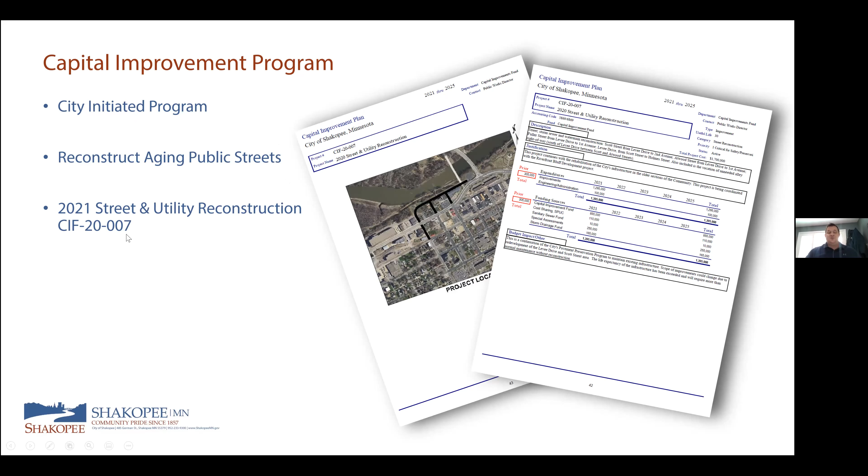The proposed project location, the original CIP, included all of Scott Street from 2nd to 1st. It also included Atwood Street from 1st Avenue or County Road 69 up to Levee Drive, Fuller Street from 1st Avenue up to Levee Drive, and Levee Drive from Scott Street just past the Holmes Street Bridge and before that parking lot on the east end.

This CIP project has been amended. We are not going to be reconstructing Scott Street from 1st Avenue to Levee Drive, Levee from Scott to Atwood, or Atwood from 1st to Levee. Those will be constructed as part of the River Bluff development.

The City of Shakopee EDA, the Economic Development Authority, has entered into a developer's agreement with that developer, and as part of that they will be doing those public improvements. We are coordinating that effort with the city and the developer.

So what do we have for infrastructure out there? Scott Street, this is from 2nd to 1st Avenue. Right now it's 45 feet wide, asphalt roadway. From the picture you can see it's heavily cracked, alligator cracked. It's a relatively flat street.

The north half of the block up above here has concrete curb and gutter. The south half does not, leaving us with very wide roadways. You can see mud and other stuff being tracked out into the street here.

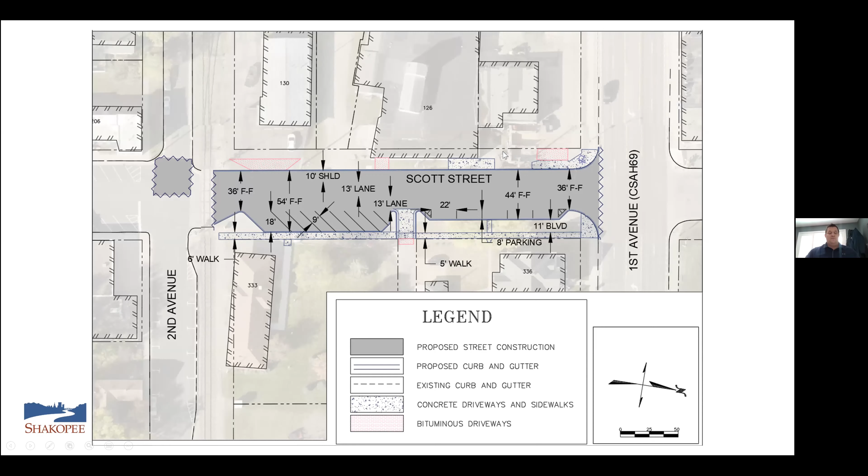On Levee Drive, here are the pictures for that. Right now it's 27 feet back to back, 26 face to face, bituminous roadway.

The west half is generally flat, slopes pretty good on the east half. It's got concrete curb and gutter, and it does have a storm sewer pipe system that drains it, most of it directly to the Minnesota River.

Along the east or the north side of Levee Drive, there is also a DNR bituminous bike path. And there's no sanitary sewer main in the roadway.

This roadway was generally built around 1967. You can see from the pictures, things have deteriorated significantly. There are areas of curb where we can't even get drainage to the structures. Lots of cracking and deterioration.

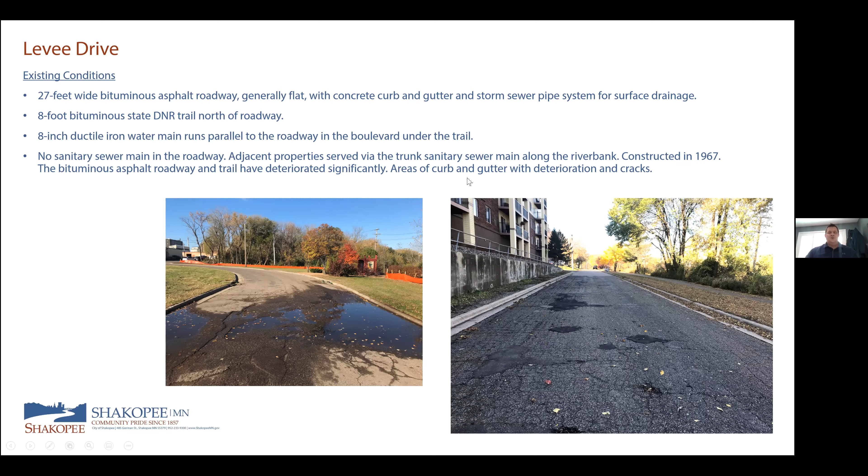So, proposed conditions for this roadway. We're going to reconstruct it to a similar standard: a 4-inch bituminous asphalt surface with 8 inches of Class 5 aggregate.

We're proposing to add parallel parking on the north side of Levee Drive, opposite the apartment building, as well as another block east of there. Some of this parking is being added for the adjacent apartment being constructed to the west, and we're setting up this area for additional parking as the park's master plan develops. There's redevelopment opportunity for Huber Park and this parking lot on the east end of Levee Drive, which will accommodate that parking.

We're going to install a concrete 5-foot sidewalk along the back of Levee Drive. With that parking adjacent, we want people to be able to get out of their cars and connect to the city sidewalk and trail system.

We also have to reconstruct a small portion of the DNR trail due to the street grades. We're going to put a couple extra catch basins in the area to accommodate the additional impervious surfaces we're adding and pick up the water.

We'll be doing upgrades of all the ADA facilities—all the sidewalks and ped ramps will be upgraded to make sure we meet our ADA criteria.

We're proposing to install 2 streetlights for the new parking spaces—one near the gazebo area and one somewhere down on this portion of Levee Drive. No sanitary sewer or water main improvements are needed or proposed in this block.

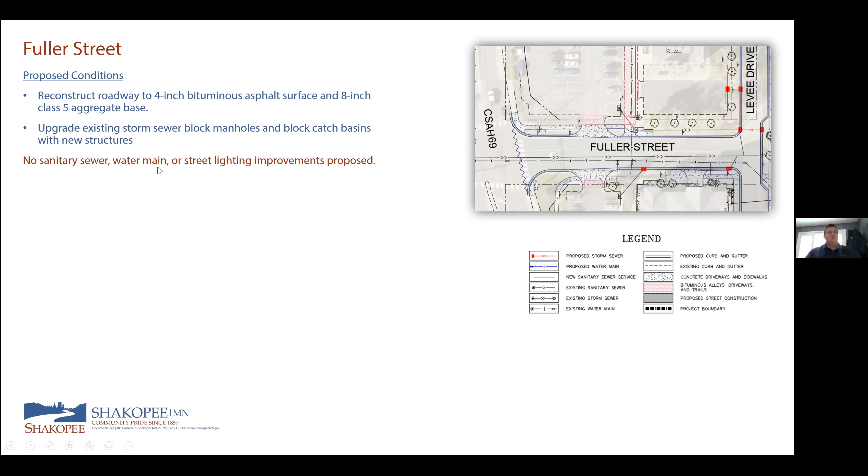There's no sanitary sewer, water main, or street lighting improvements proposed along this block.

The alley between Atwood Street and Fuller, adjacent to your property, currently varies between 12 and 14 feet wide, averaging 13 feet. It's generally flat, with no curb and gutter, and there are storm sewer catch basins on each end that capture surface water from the alley.

Shakopee Public Utilities has an 8-inch ductile water main under the alley, constructed around 1980, in pretty good condition. There's no sanitary sewer under this alley; adjacent properties are served via the sewer trunk line by the river, also constructed in 1980 when the water main went in.

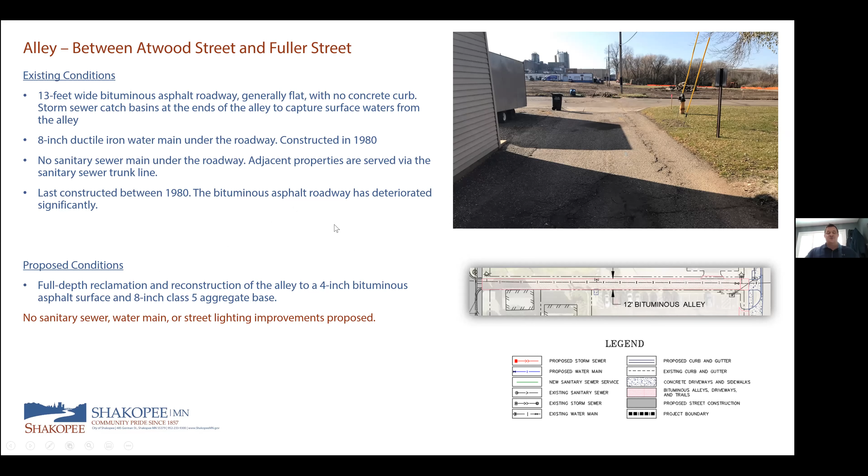From the pictures, if you visit the site, you can see the roadway into that alley is in tough shape. So our proposed condition is a full depth reclamation, grinding the existing asphalt surface into the aggregate below, then paving a new 4-inch bituminous asphalt surface over the top. There are no sanitary sewer, water main, or street lighting improvements proposed for this alley.

So you mentioned the River Bluff development, which will be coming in adjacent to you at Atwood, Levee, and Scott, encircled by this block. This is just a little picture and depiction of what is tentatively planned and seeking further approval from City Council to move forward with.

The apartment building is under construction. They've probably got about 80% of their footings in place right now, and we're working with the developer to refine and finalize the construction plans for the roadway elements. I can come back to that.

We're looking at, on Atwood Street, diagonal parking on the west side, parallel parking on the east side—a little bit more diagonal on the east side, excuse me. Levee Drive on the north side will again have diagonal parking, increasing parking throughout all these areas. We'll have a concrete sidewalk running back behind there that'll tie into the DNR trail system and provide connectivity for everybody in the area.

Scott Street, we're trying to maintain as much of the parking for the adjacent businesses, understanding there'll be demand from the apartment and the restaurant. The restaurant's proposed to be in the northeast corner of the facility.

I can go back one here. It's like two levels of townhouse style houses up against Levee Drive, apartments for the rest of it. They do have underground parking for their residents. There's also some attached townhouse style units in a separate building up along 101 that will be constructed as well, with a couple levels for that restaurant with lookout over the Minnesota River.

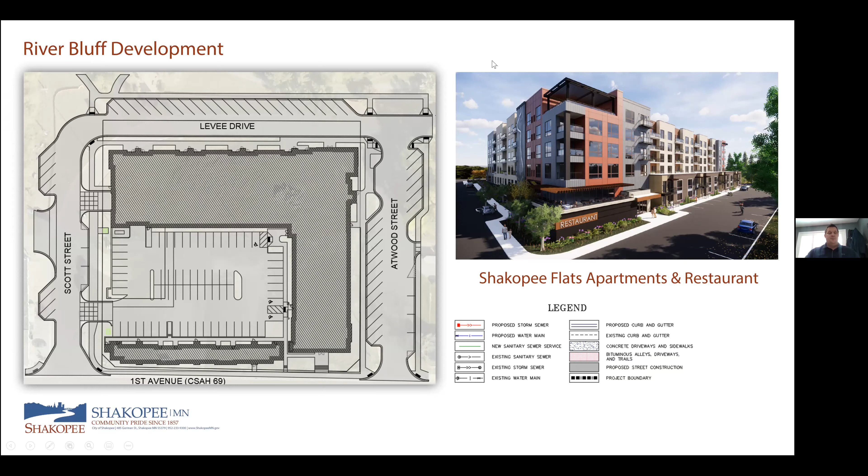So what does this look like for you guys? We take care of everything. We'll do the construction—pipes and utilities get dug in first, then we start the street reconstruction. We'll take care of pretty much everything, putting things back together the way they had been originally constructed, into newer, same, or better condition.

These are some pictures of past reconstruction projects showing that everything's tied in. We'll restore driveways to matching conditions—if it's concrete, you'll get concrete back; if you have pavement, you get pavement back. Everything will be restored with 6 inches of topsoil and sodded, and sod will take care of getting it to grow. There's a warranty period that goes with all of this.

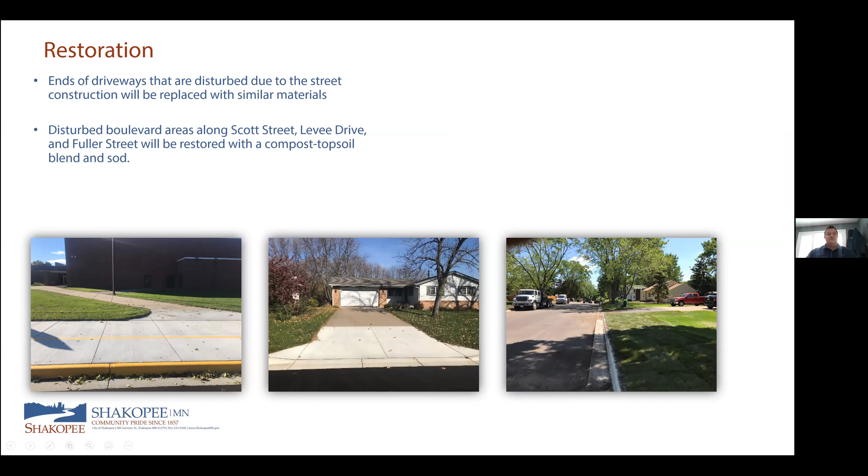With that said, these reconstruction projects come with inconveniences, just in the inherent nature of doing construction. There's trenches that need to be dug for those pipes, and anywhere in this area there's a lot of bedrock, so some of that pipe excavation could be slow to remove the bedrock. While they're digging, there's disruption.

Concrete always poses a significant issue for access—when we pour the concrete, we need roughly 5 days to stay off it to allow it to cure and harden, and similarly for elements like the paving. Sometimes these projects are dusty, dirty, and can be muddy if we get a lot of rain.

We have staff on site that work to mitigate all these issues and work with you. Throughout the project, we'll be talking to you, providing newsletters and website updates. There's even a sign-up for updates.

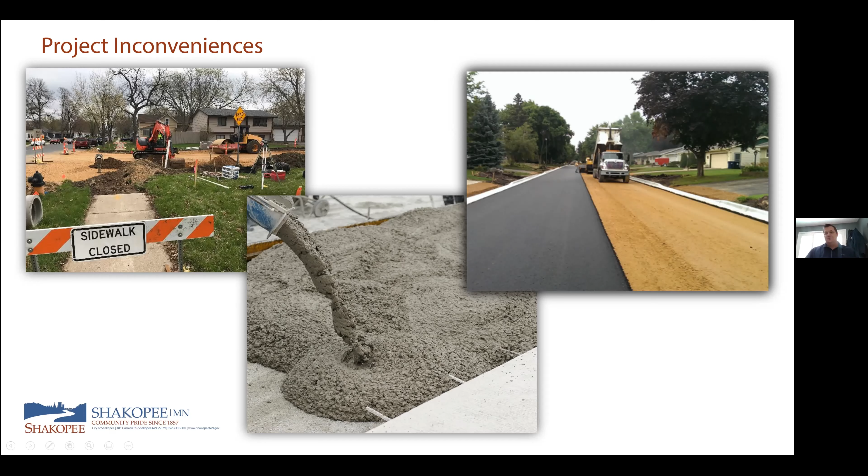Excuse me, I gotta go back a couple here. There's even a city sign-up email blast system that you can sign up for our weekly updates, and as we know more information, we pump that information out to you guys as well. We'll make sure you have our resident project inspector on site, with all their contact information as well as emergency and contractor information along the way.

So what are we looking at for costs here? Probably the question that everybody's looking at, right?

So the total improvement cost is right around $971,000. That's all engineering, administration, and construction costs. The street portion, including the street lighting, is about $736,000 of that. About $108,000 is storm sewer. There's about $10,000 in sanitary sewer work, and about $117,000 in water main SPUC related items.

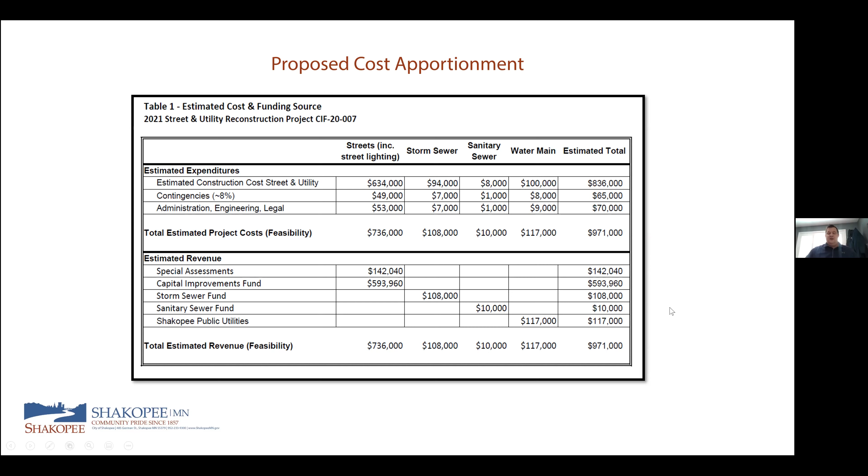Now, with all of these street reconstructions, the city has a special assessment policy that has been determined by the city of Shakopee, the city council. This policy has been in place for a long time with very consistent administration.

We assess 30% of just the street improvements to the adjacent properties. Sanitary sewer is paid for out of a sanitary sewer fund. Water main is paid for by Shakopee Public Utilities. Storm sewer is paid out of a storm sewer fund.

So you're just paying for basically the curb and gutter, the bituminous asphalt, rock, sod, the restoration elements at the surface. There's some notable stuff in here. All the lots in this project area are proposed to be assessed on a front footage basis, but with that said, there's some exclusions.

On Scott Street, I have one single family residential property at 336 First Avenue. Consistent with all of our other projects, we assess those, even though the long side of their property is 142 feet and it faces our project, they'll be assessed on a 60-foot lot equivalent basis, like all the other residential properties in town. The other 82 feet will be proposed to be paid by the Capital Improvement Fund that will not be assessed. The north half of Levee Drive is not proposed to be assessed.

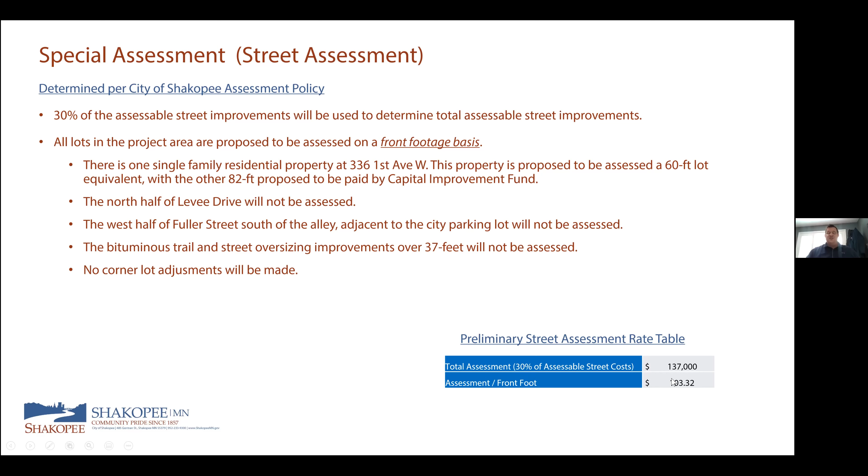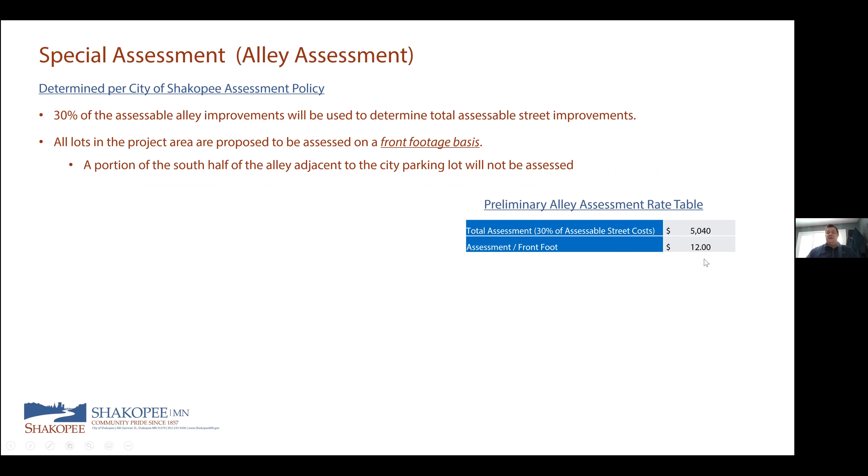There's a total of $137,000 that is assessable directly to the adjacent properties, and that works out to be about $103 per linear foot of front footage. And then for the alley, much narrower, no curb and gutter, all of the above, that's a much lesser cost. There's about $5,000 in assessable costs for that alley, and it's about $12 additional per foot for that.

A special note, typically if we were to reconstruct Atwood, Scott, and Levee Drive around the River Bluff development, you'd be assessed for a portion of that project as well. However, similar to what we've done in other projects, when developers come in, this particular project received a tax increment financing district for this project. And a portion of those TIF funds will be used to offset the assessment costs.

And the developer is picking up the half of his, the street that would be assessed as part of his development cost as well. So your property, John, would not be assessed for Atwood Street at this time. 40 years from now, if that road ever gets rebuilt, then you would be assessed. Similarly, for the residential properties, they will not be assessed for their portion of Atwood Street.

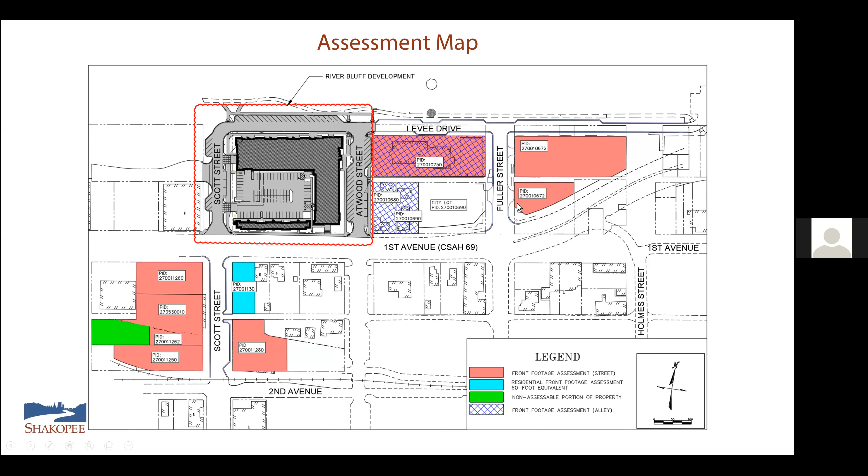And it's a tax increment district. At that time, the city was to create a bridge, believe it or not, across the highway, so that our tenants would not have to cross First Avenue. So you're saying a bridge there somehow. It was a bridge, yeah, that was part of the agreement. It was never done by the city. But it was part of the agreement that I made with the city of Shakopee, and it was never fulfilled.

So I would say this, John, if you have any of that, I'd like to exchange contact information here in a bit. I can check into that, I'm totally not aware of any of that. The only thing I could think of, it doesn't get your people across directly, there is that tunnel underneath of 101, maybe that was considered the quote bridge. No, actually this is a pedestrian bridge above the street, above the highway. Yeah, I'd never even heard of that.

I believe you, I'm just mentioning it. I just thought of it the other day when I got your information. But that was part of the redevelopment agreement, and a lot of people asked me about that at the time. I said, well, the city will eventually get to it, but they never did. It was never done.

Yeah, I've never actually heard about it. I started here probably around '98 or so, but was never even aware. If you have something on it, send it over to me and I can forward that to the bosses for further discussion, or we can take a look at that. I didn't know that. Right now we have nothing in our capital improvement project plan. It's gonna be very expensive.

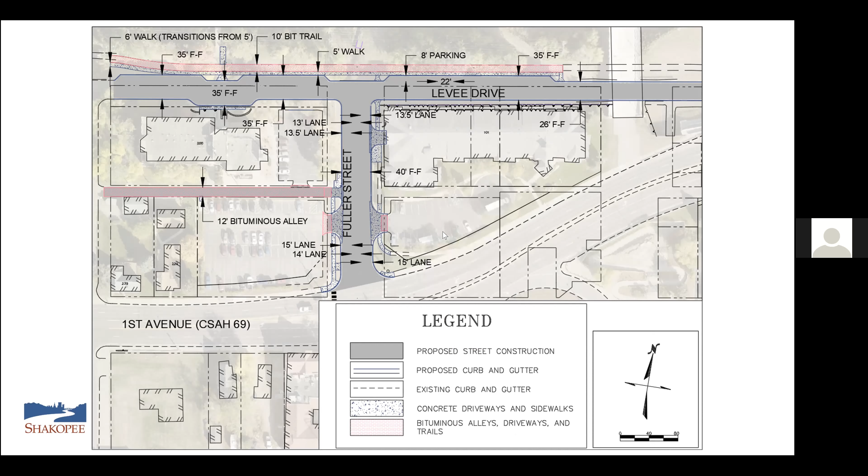So I'll follow up on that for you. We have some documents too that I can get out of storage. But please understand, I'm not insisting the work be done, I think that'd be a really burden for the city, and I don't know if it's really necessary. Well, it should be considered and at least thought about, right? Yeah, right, all right.

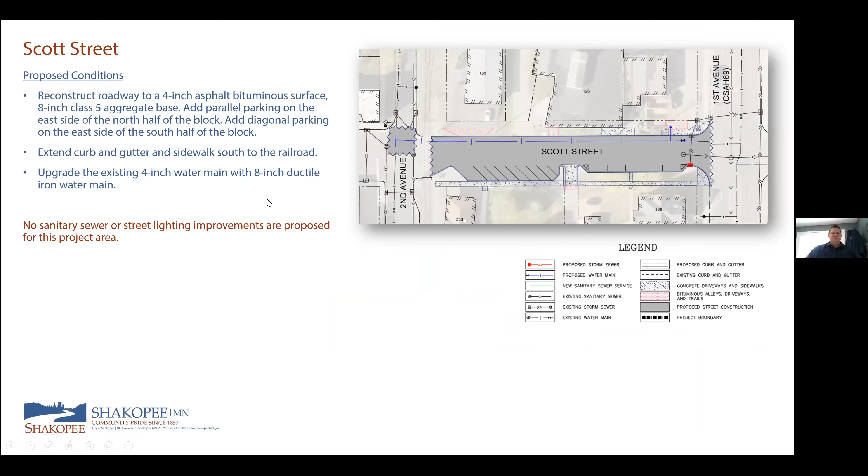Any other questions, thoughts, concerns? No, not for me. Okay, that's really all I have for you.